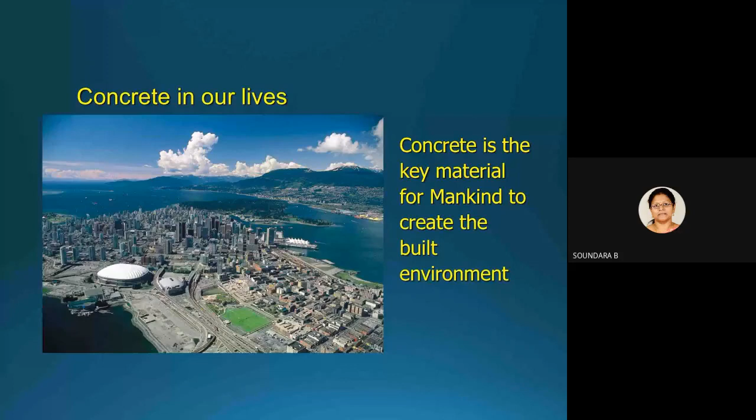First and foremost, the top consumption by human beings is water. Not only human beings, other living creatures also. Next to water is concrete. Wherever you have infrastructure or buildings, without concrete, nothing happens - whether it is bridges, roads, railway girders, or underpasses. As population growth increases, infrastructure will also increase, and naturally you'll be bound to build more structures, mostly with concrete. Still, there is no replacement material for concrete. Concrete is a mixture of two or more components like cement, aggregate, water, and admixture. These are all well-known definitions.

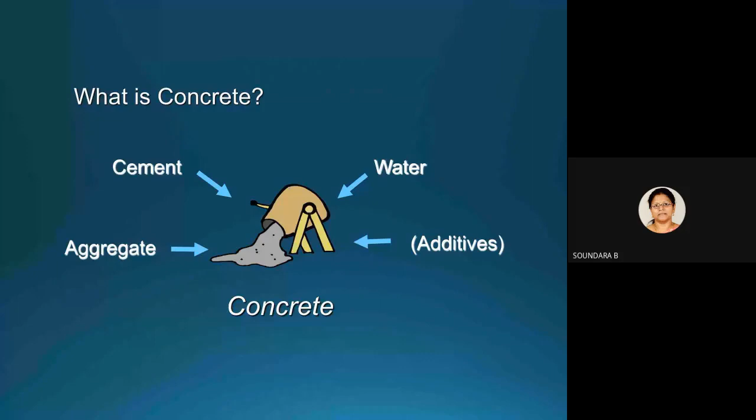Now my question is, how good is this really? Why do we have to make this forensic and failure investigation? What is the ultimate root cause? Some structures are very ancient, built in 3000 BCs or 6000 BCs.

This is a simple view of an Egyptian pyramid. It is long lasting, and it is made up of geopolymers. The concrete was not deteriorated. Of course, it is in the desert area, and we know the temperature in Egypt is too high. So even after 6,000 to 7,000 years, the structure seems to be long lasting.

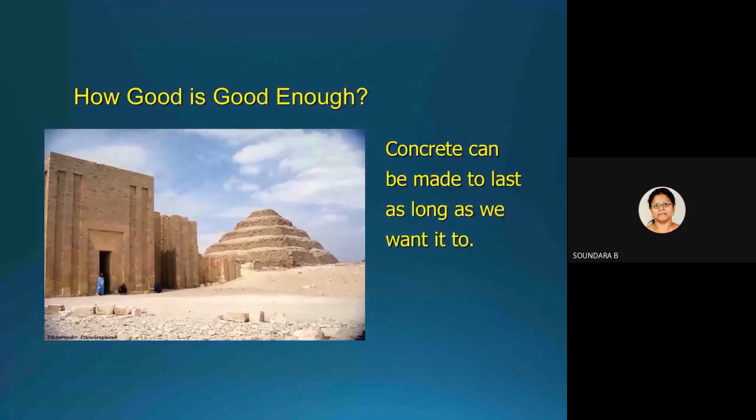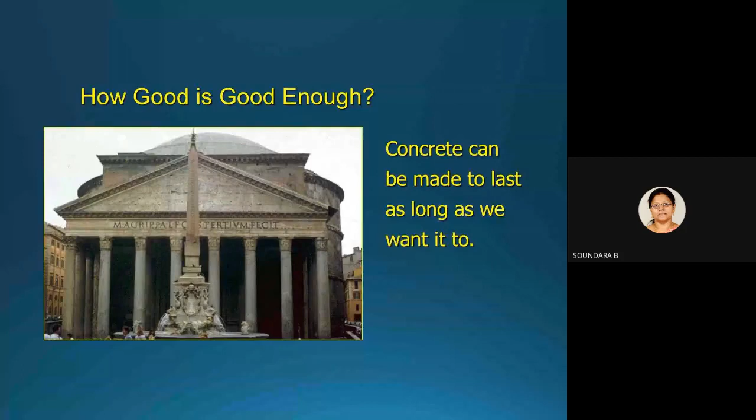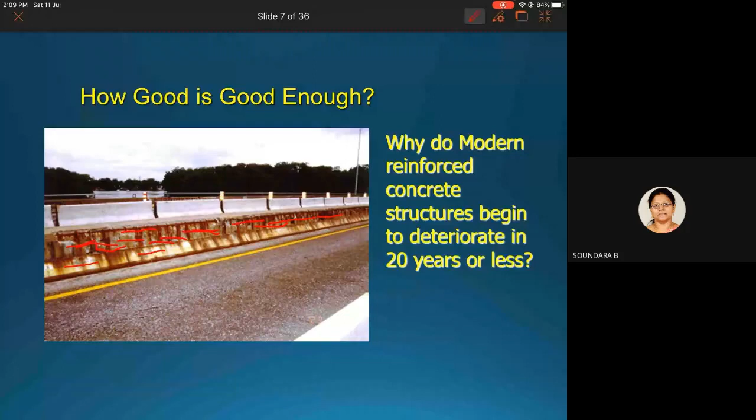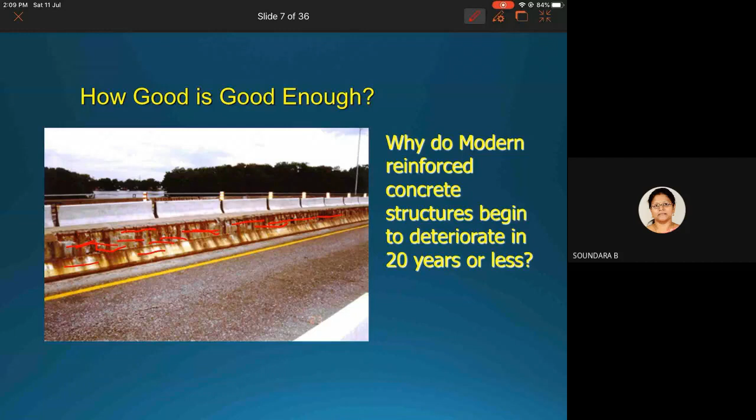Why? So this is the topic which we will be seeing - why has this happened? What is the root cause? Here there is no question of 'maybe it might be' - you cannot say like that. Maybe, might be, means you yourself are doubtful about the structure, not very confident enough. Why is that? First and foremost, we need to address the problem - what is the primary root cause for this?

The root cause possibilities are broadly classified into four types, which I have segregated into four classifications. We need to just diagnose the issue, whether it will be because of this.

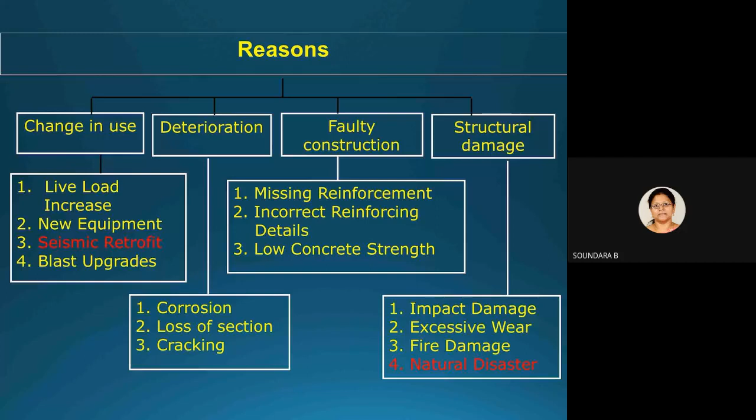Because lots and lots of - suppose when a problem comes and you are very severely sick, when you go to the doctor, he will not give you an injection or medicine immediately. He will ask you lots and lots of questions - what is the symptom, how did you face it, what was the problem encountered, how long have you been facing this issue. He will ask some symptoms, whatever comes, one by one, and based on that he will diagnose - okay, this guy had taken something like food poisoning, and he didn't take any other thing, and subsequently he got this problem, etc. He will do the thing.

So the same sort of exercise, you need to diagnose, you need to do some work. The first thing is, what are all the things? First, change in use, deterioration, faulty construction, structural damage. You need to dig out all these aspects and examine them.

Change in use means - what happens is, let us take an example. You have built a bridge, suppose in the 1940s. Later, in the 2010s or 2015, it got severely damaged.

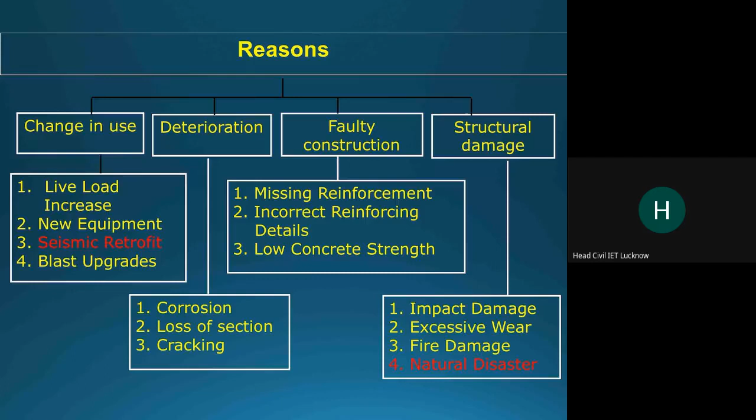So now, what is the weakness in reinforced concrete? These 4 points have to be kept in mind, whatever I have shown previously. Based on these 4 points, you have to start building. So I'm telling you now, what is the disadvantage of using RCC? I'm not saying don't use RCC, but you have to use it with proper precaution. If you fail to implement things lethargically, you will get serious disturbances like this.

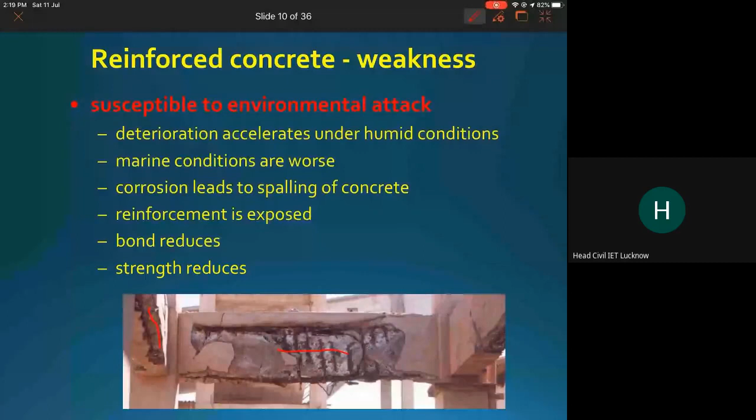You see how badly this beam is affected. You see this portion. This is purely based on the corrosion action. And you see the quality of the concrete, how poor it is. So that is the thing.

So what is the weakness behind this? It is more susceptible to environmental attack. That's why IS 456:2000 always specifies, from mild to extreme environmental condition, please use a maximum water cement ratio of this much, please use a minimum cement content of this much. In case you are using PCC, use this much; in case you are going for RCC construction, use this much. That is the reason why they have categorized 5 different environmental exposure conditions, and you got to use it very carefully.

Here I presume that this concrete is of poor quality, so it has given enough room to ingress all your moisture, that is O2 and other external agents. So the problem is with the concrete first, and then when the ingress of moisture occurs, the electrochemical reaction starts and it starts peeling off.

Whereas the reinforcement, whatever they have tied for this beam element and everything, is very obvious, very clear, very perfect also. But the thing is the deterioration, the deterioration is in the concrete. The problem is with the concrete quality.

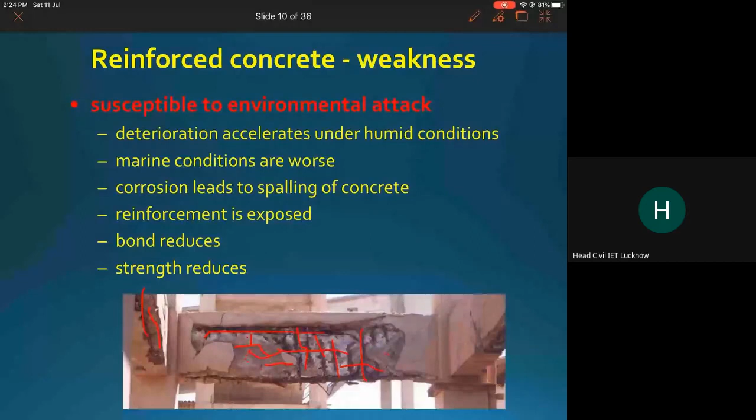So this is a practical case study from Nagapattinam, which I visited some 10 years ago. This is a police quarters building in Nagapattinam. What happened is it is a 25-year-old building, but for the past 5-6 years they weren't using this. So don't think these are just the termites. It is not the termites. It is the peeling of the rebars, and it has peeled and it is hanging here. So you see how bad the condition is and how poor the concrete is.

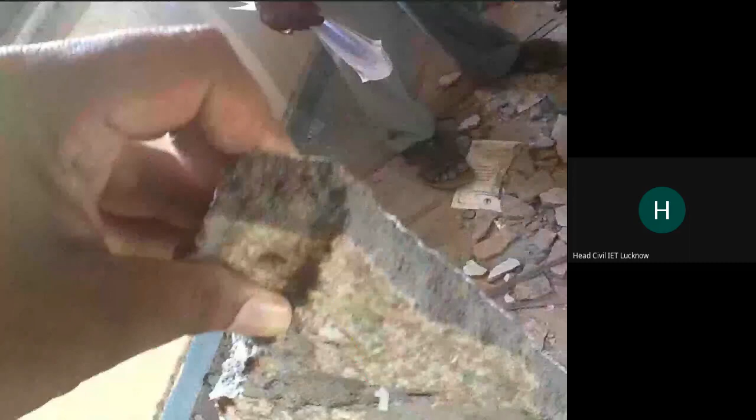So the PWD people came to me and they were asking what is the opinion? Can we retain this? Actually speaking, this is a five-story building. It is a police quarters building, and at one point of time when I was moving to the third level and fourth level of the building, the staircase was very bad. So when we climbed, the concrete started falling down. You see how risky it was.

So then the engineers over there were trying to pull me out. Sir, we will go immediately. Then I said, no, no, no. Let us go inside and we will see what is going to happen. No problem. If something happens, we will jump. No issues. What will happen? Only some leg or some bones will get fractured. No problem. I went because 10 years ago I was still young, right? So I was not scared to go. I was very keen to see, because the structure is of course in a very bad position, but why has that come?

So we went to the fourth floor level, and the seashore was very close. It was just 800 or 900 meters. This was built somewhere in the year 98 or 99. At that time, nobody used M20 concrete over there. They just simply went with 1:2:4. They used 1:3:6, or some 0.7 water-cement ratio. They were never bothered whether it is a seashore area or whatever. And the temperature in Nagapattinam, you will know very well, is very high. Plus, since it is very close to the seashore, these all will be in extreme condition.

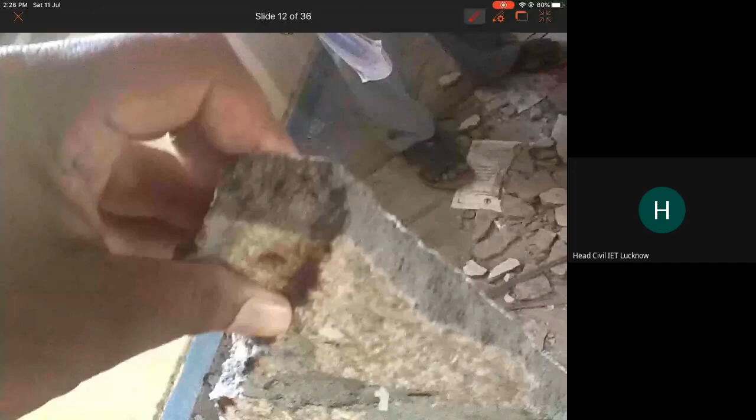So in this case, I started digging into the histories. I came to know that the concrete quality was poor, and they didn't follow the proper procedure. And more importantly, the cover block given to this roof slab was totally insufficient. And when the concrete quality is poor, the cover block and other things are secondary only. So you have to make a very highly impermeable concrete, then only you will not face problems to this extent.

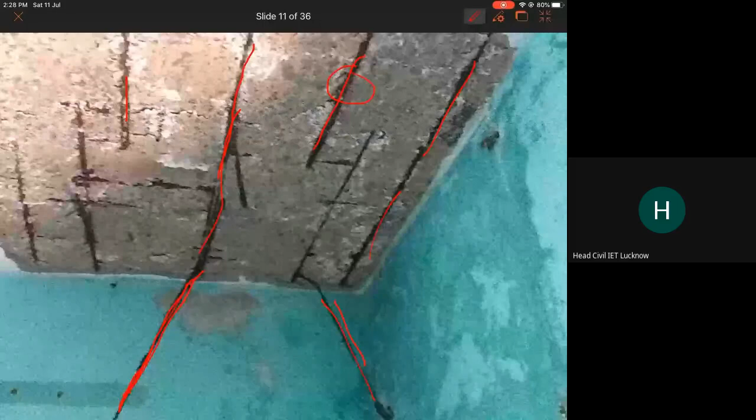If they would have attended to this problem some 5 years ago, we could have safeguarded to some extent the maintenance, the abrupt dampness in the walls and everything. The condition has become worse and worse. So then finally I said, if you want to go for repair work, you just calculate: the present cost was 3 times the estimated cost for the repair work.

So we were seeing the foundation and everything. The foundation was strong enough, it was good, but the superstructure was very bad. So then we told them to demolish the superstructure, the five levels completely, and we told them to rebuild, reconstruct. So this was the procedure.

So these are some of the worst. Still many things were there, many other places I have been. So this is a small part of the case study which I want to show you. Lots of things were worse than this also. So that is the thing. So in this circumstance, we have to diagnose.

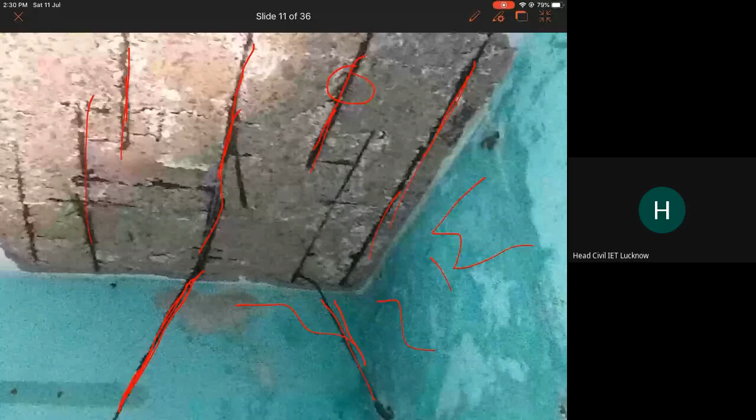So a very good valid proof in my hand is this. I can say how bad the concrete is, and moreover, they have left it unoccupied for 5 years. They didn't attend to anything. After 5 years, after further undergoing more and more deterioration, if they want the repair work, how to do it? We can do it, but the cost is going up. So for that purpose only, we have to collect some evidence. That is the reason why we call this forensic engineering.

Just imagine some murder has occurred. When the police officials come to investigate how this murder has occurred, what was the root cause, they will not allow the public to come and touch. They will be calling the forensic people to take the fingerprints if any. With those fingerprints, they will have the criminal list, so they will be scanning and they can identify the person. So this is called forensic investigation, the intelligence. They are collecting some proof.

Like if the police have caught the accused, naturally the opposition lawyer will defend. He will say that my client is innocent, he has not done it. So what is the proof? The judge will ask, what is the proof that he has murdered? So you have to collect some evidence. So that evidence is called forensic engineering.

In the same manner, for a structure also, you should know what is the reason for this failure, because many legal aspects will come. Whenever some sort of sudden failure comes, it will go into the legal aspect. So the person who is nominated as a third party or a visitor should be capable of explaining things. So he has to collect the evidence.

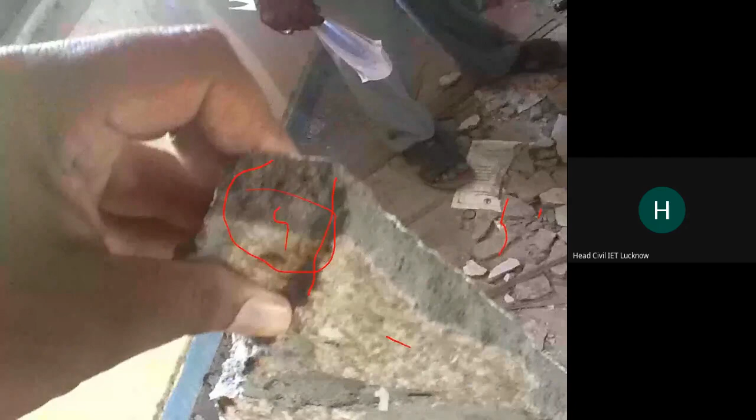I have calculated. I was asking how many buckets of water you have used for this. So the person who constructed, an old person, was there. So he told the specification. From that we worked it out. So when you do the forensic investigation, being a higher official, you should not feel reluctant to talk with the lower people. You will get some clues.

Normally, when I go for the investigation, I don't bother about the chief engineer or assistant executive engineer talks. Their input is also very important, but I am in touch with them forever, so no problem. But people like the masons who were involved, I will be going down to them and asking. So we will get some valid information from them. So these are some clues to collect things.

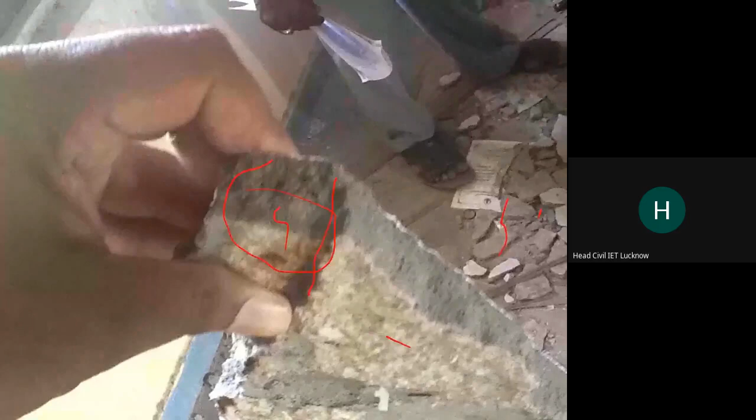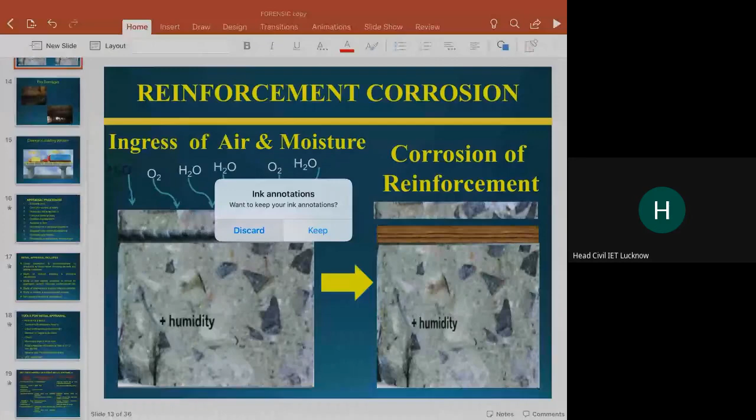So this is what you have learned in your concrete technology, how corrosion propagates. Ingress of air and moisture leads to further damage, due to the sudden ingress of air and moisture. So this is the output. So you can see here, this leads to corrosion. The more permeable your concrete, the more the electrochemical reaction happens. Your steel bars will get stressed and form rust.

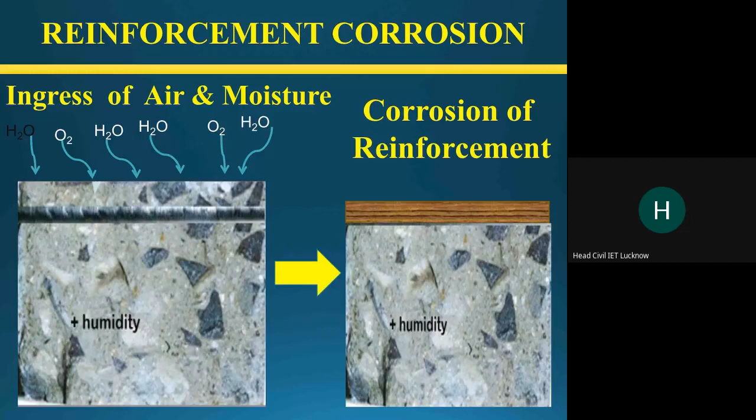Fe2O3 forms. So this is another photograph of a building which was subjected to fire. You have to be very careful because we don't know how that concrete will behave. You should know the intensity of the fire. Though the external temperature was like 150 or something, the internal heat will be like 80 or 90 degrees. So only because of that, your concrete was safeguarded to this extent.

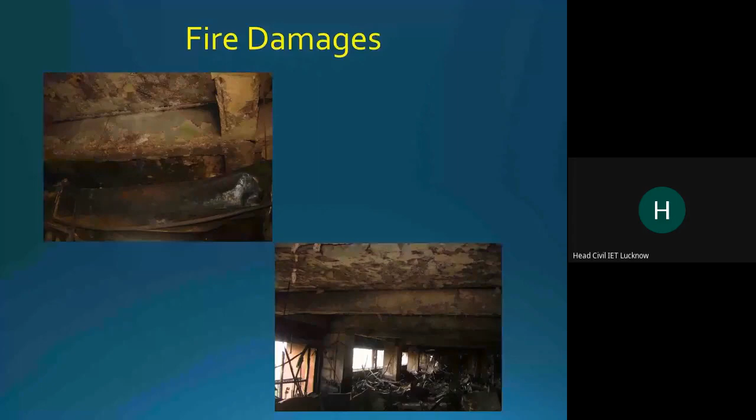Otherwise, it would be gone. You cannot see anything. You see here, these are the less impacted ones. If the fire intensity was too high, you see how the AC duct was melted. This is a commercial building, and suddenly it caught fire. So how to do it? We should be in a position to do the repair work.

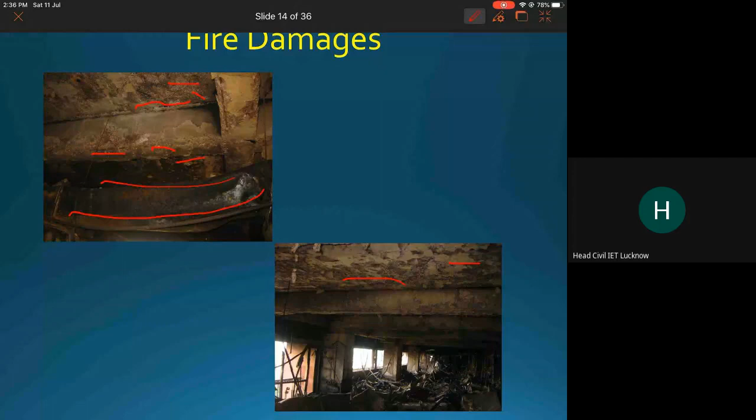See, such commercial buildings would have been insured. So the insurance people will come and inspect, and they will rely more on the report of the third party agent. With a government organization, the expert has to certify that this has happened and this was the root cause. Without this proof, the insurance amount cannot be claimed. So these things become very, very important.

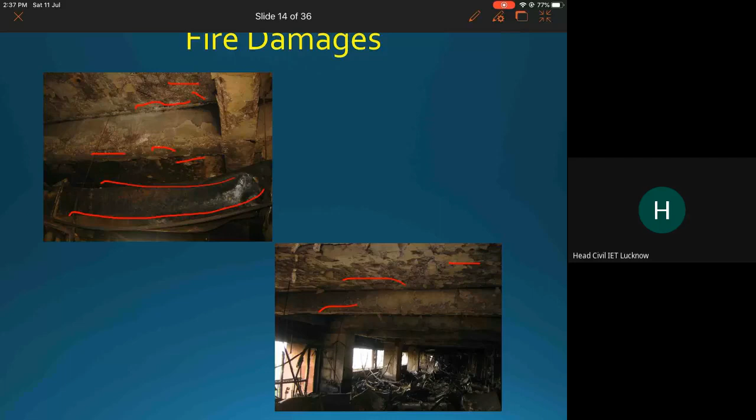So you should be in a position to know what is happening and why this has occurred. Of course the intensity of this fire was very minimal, so we safeguarded this. The photographs of that will be coming further. In those four subdivisions, I have given you fire damage. To show that, I have just shown two photographs, but we will see it in the later part.

See, this is the change in loading pattern, which we saw in that flow chart. Imagine in 1950 the truck size was only this much, so the axle load was very less, and the bridge was there. Whenever you go by a weighbridge, they will tell you the bridge's allowable axle load is only this much. They should have the weighbridge record, and only then will the police allow that truck to pass over that bridge. Otherwise the bridge will fail.

If not, he has to go around. Going from one place to the other will be just 10 kilometers if he crosses this bridge. If the load does not meet the requirement, he has to go 50 kilometers around to reach the destination. So that is the difference.

So that is the reason why between the 1950s and 2000 the variation is more, because of the population demand. The population in 1950 was very less compared to 2000, but in 2000 it is very abrupt. So these are all the factors you have to keep in your mind, right?

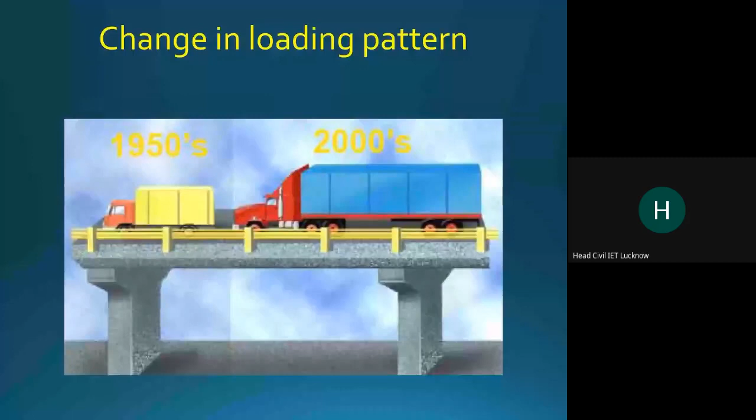Like, you should not just go, like I have been to Nagapattinam, that building. No, same way you should see the safety also, because our safety is also very important. So now if you tell me to go over there, I will think twice. I will not immediately go. I will ask them to put some other means to come to that place to investigate.

But I will not directly climb, because now I'm not like how I was 10 years ago. So those things are there. So it is like that.

So these things you have to carry out. You have to get the data. That is our duty. Only after that can you give the final report. So for all those things, you should take the evidence. If any testing is required, you have to do it.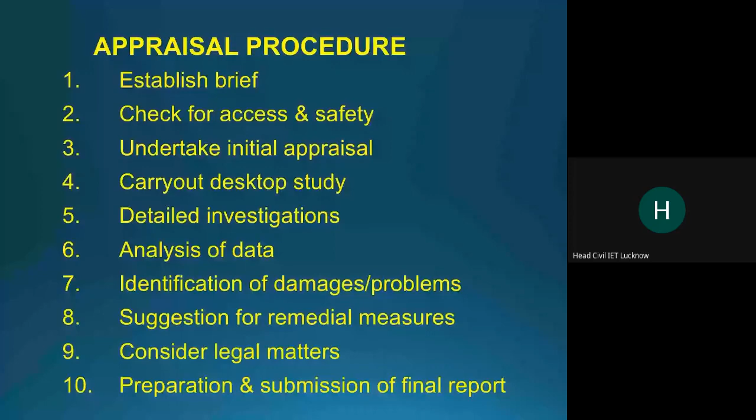See, what is this initial appraisal? First and foremost, visual inspection. Don't sit here and ask the client to send the photograph. That is a wrong concept. You have to go to that structure and visually inspect. If there is no provision, they have to make some alternate for you, like using a ladder or something. You should physically inspect.

When you go there, you will get some evidence. Otherwise, you just sit in the four walls and ask for photographs, which will never come, because site inspection, visual inspection is very very important. Say I have a structure that is deteriorated somewhere in Mudumalai and the PWD people are calling me, I cannot go to Mudumalai quite often. So once I go, I have to utilize it completely. I have to take as much evidence as possible. I should study the structure completely.

Then study the as-built drawings and structural calculations. You have to see whether it has undergone any structural failure, any under-designing, if anything has happened. So all those diagnoses you have to do. Then if they have previous material test reports from the time of construction, or some third party inspection reports, you have to take all those things. You have to see the historic records. Don't miss any record. That is very very important.

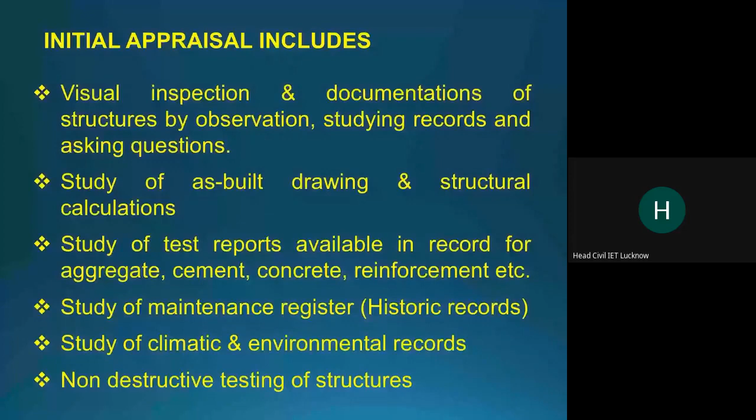Finally, you should do non-destructive testing. Non-destructive testing is very very important. So a forensic investigator who goes should make sure that these tools, if not full, at least some partial amount, say 50% or 60% of these tools, should be ready.

You should tell at least the engineer side who is calling, the PWD people or whoever is taking you, okay, please ensure that. Or if you have your own kit, you can take the kit over there and test. Better to have your own kit rather than telling them, because you are investigating, you are giving the report. So don't rely on any third persons.

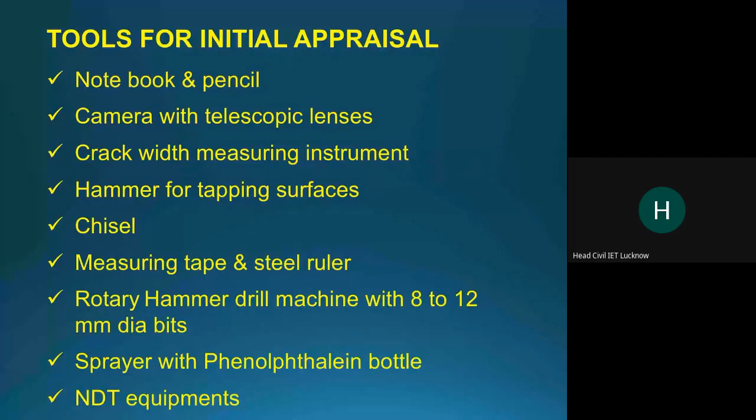So these are some simple NDT tests. Your rebound hammer, ultrasonic pulse velocity, whatever is required as per the site condition, you have to take, and you have to work. Then from that, what is the outcome based on your initial appraisal? What are all you are going to recommend immediately?

See, suppose if I was suggesting some repair and rehabilitation method in that police quarters building, I must tell them the person who works there should be freed from the dangerous things. So proper propping or any other things, the temporary supports and everything should be made rigid in such a way that the person who works over there should not get any risk. So those recommendations and everything you have to give.

Then you should say some appropriate technique. There are numerous techniques. So what are all the best techniques that can be implemented? Repair and rehabilitation technique, you can say. Then identify the probable cause of damage until the detailed investigation. It is your duty, you should analyze this failure. So is this a corrosion crack, or is this an alkali aggregate crack? Or else is this carbonation? Whether this concrete was carbonated and other things have come into the picture. All those things you have to find.

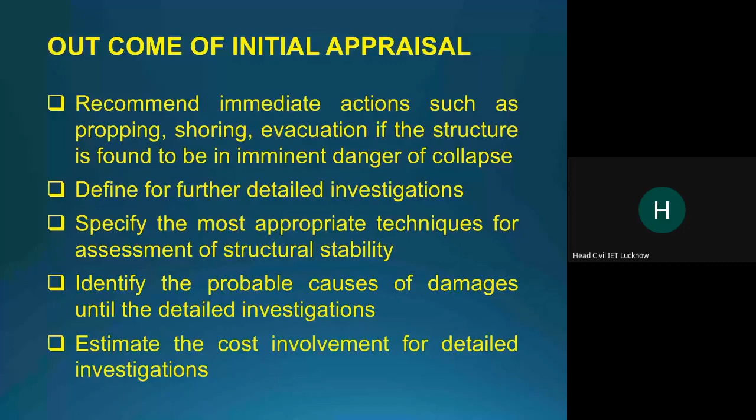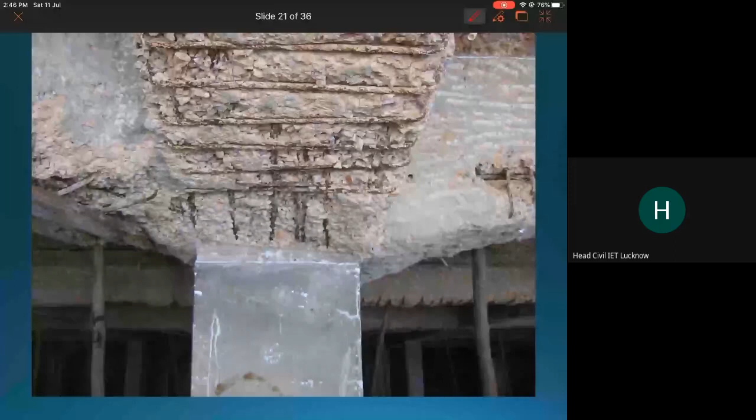You see another example. Why I am putting this photograph is, this is another basement framed structure building in the sub-basement. You see the quality of the concrete. It is very poor here. Though the steel reinforcement and the stirrups were done okay, still you see the quality of the concrete, there is no proper packing. So thereby it got severely corroded, but still the bars are not massively corroded. It has some life, we can still strengthen. But the process is quite tedious.

So if you just pack it with some mortars or anything, again after 5 years that mortar portion alone will fall down. So that is not the correct practice of repairing. You can think that it is just very cheap in cost. It is not that much, but until you strengthen this concrete and make it highly impermeable, these things will propagate as the time progresses. So this is very important.

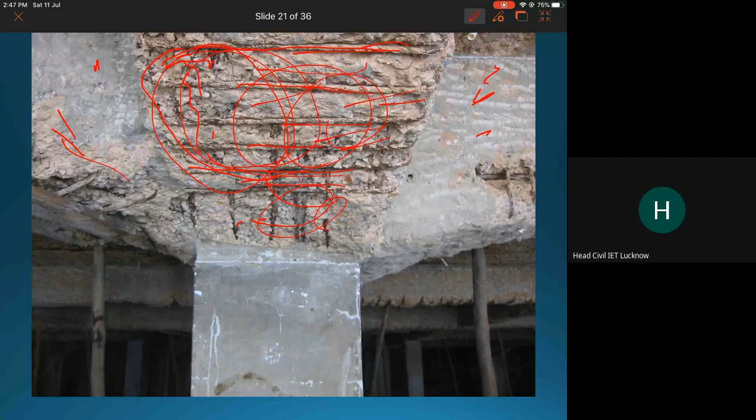So you see this, you can see the concrete. Exteriorly they have just plastered the surface. That was looking good, but after chipping off, you see there is no cement at all. Most of the particles, you can see the sand particles more than cement. So that means they haven't followed the required cement content. You see here, the sand content is more. There is no paste content at all. Then how will you get the bonding when you haven't added the cement content adequately? So these are all the poor things which you have to take seriously, which we cannot compromise.

So this is the sub-basement area. Can you collapse the entire structure? Can you demolish? No. We have to repair and rehabilitate. No other go. The cost will go 3 times if he demolishes that. Only this portion was damaged, only these adjacent portions like this. Whereas the superstructure and other places were okay. But if the entire thing was like this, then it is a bad sign. How much loss? Imagine this has occurred 5 years ago or 10 years ago. Just imagine the initial investment made by that client. All his money went in vain. So these are the things.

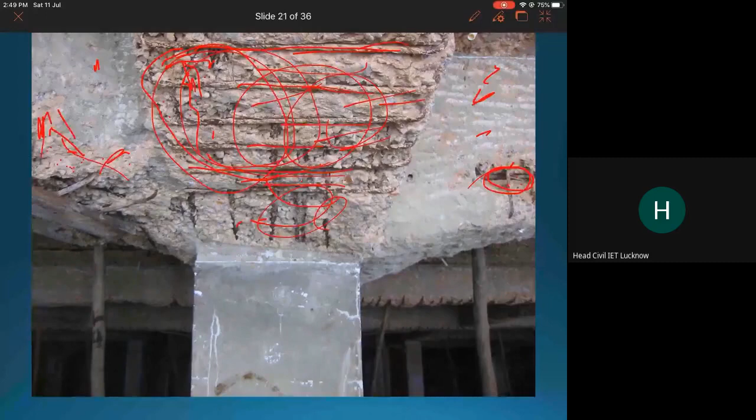And this is another case study, the foot over bridge.

For the safety purpose, barriers were built in such a way that the pedestrian should not come over here, and it is our duty to put some cautionary signboards also, fixed with reflectors. Especially this should be readable at night times, so the reflector boards should be fixed properly. So that is one thing.

This can be repaired. You can see the adjacent portion of this bridge, the expansion joint portion. The expansion joint is collapsed. You see here, this is the steel element which is linked from one joint to the other joint. This is the hollow, 20 millimeters or 25 millimeter spacing, whatever we have given here. So that joint is distorted, and you see here the lap has got cut.

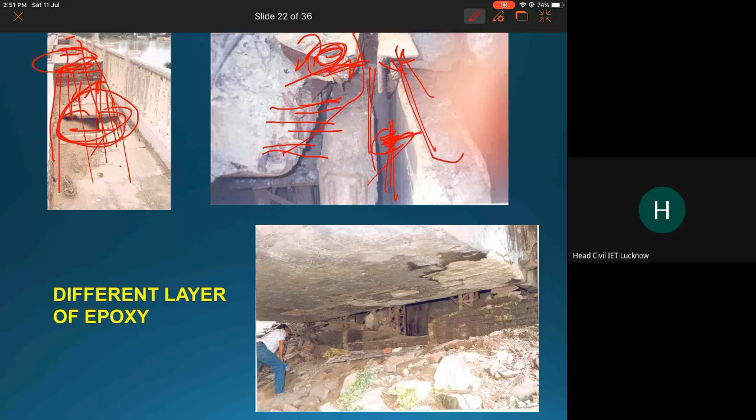So we need to rehabilitate this. Why has this happened? Because of the periodic movement of vehicles and other things, and the poor maintenance of the structure. Externally, it has caused lots of wear and tear, and because of that, this joint got collapsed. Every time the expansion joint should be sealed, and for frequent downpours, when the rain was coming, they didn't seal the joint properly.

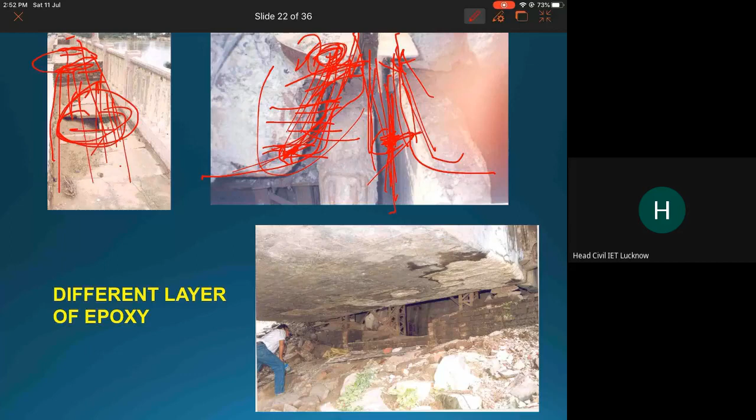The girder means, I mean to say, the slab, deck slab. The deck slab should not go to any failure. So this is distorted now, so you have to bring it back into position. You have to chip off the deteriorated thing and go ahead. For all these things, you should have proof of why this has been distorted. They will ask what is the root cause, why it has happened, and several other questions. So you should be in a position to face their questions, and reply them also in a very convincing manner.

So this is the other view of the bridge, showing how after doing the repair works, the joints and other things are tied in the lower bottom portion. And this is another thing, a silo, a cement storage silo, RCC silo.

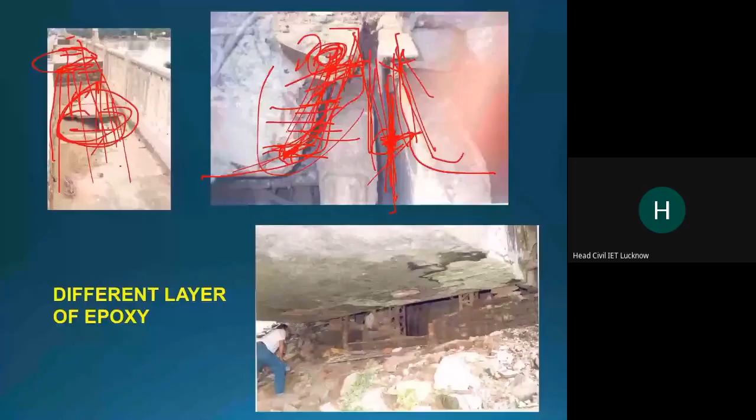The silo is severely corroded, and we worked on this. We chipped all these things, and we were measuring how much was the intensity of this corrosion, and thereby, in the later part, how this was brought to the original position. We have rehabilitated it in a proper way. We gave some protective coat and other things, and we made the concrete more denser. So this is the thing.

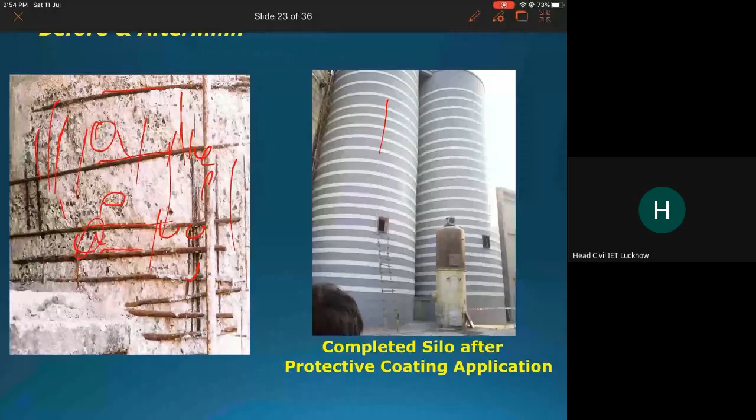For all these things, you should first do the diagnosis. What is the main cause? What is the primary cause? And then you have to suggest the apt repair methods.

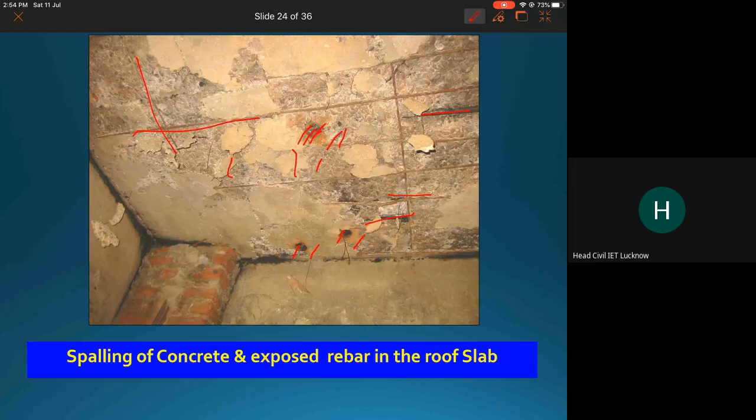Again, the building that caused fire, whatever I have shown in the initial photographs, coming to this, you see here, luckily the reinforcement, only the cover block was spalled, and the hooks, the fan and other things, the ducts didn't fail. Electrical conduits, whatever was passing, didn't fail that much. It was encased, it was properly done. So the concrete quality was also good, so luckily this got escaped. The only thing is, because of the huge intensity of the fire, these zones should be strengthened properly.

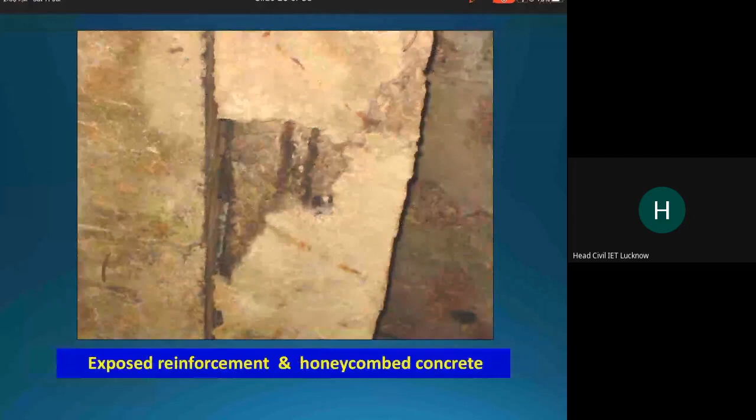So that is the thing. The rebars were exposed, and we were testing the corrosion depth and other things. So we protected the rebars. There are further other things to consider.

Luckily there was not much severe corrosion, but because of the heat of the fire, the concrete got spoiled. So the only thing needed was to strengthen this concrete. You have to strengthen this surface. The concrete should be completely strengthened, and then it can be done.

Luckily the building was not hit with excessive fire, though the intensity was 80 or 90 degrees. It was okay, halfway through, otherwise the electrical PVC conduits and everything would have been burnt.

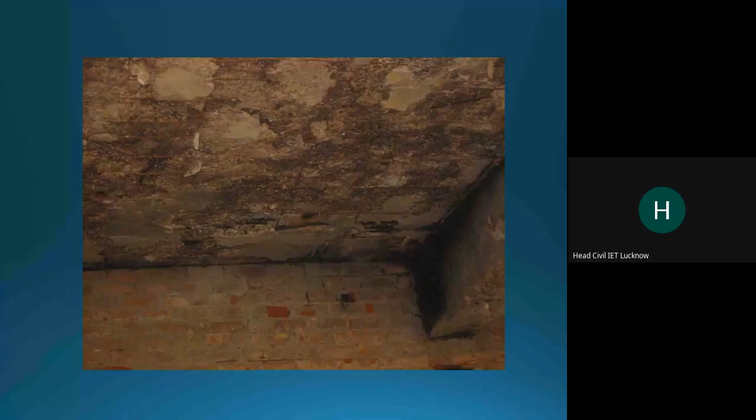Okay, so these are some snapshots. You see how black it is. So you need some preliminary treatment to undergo these things.

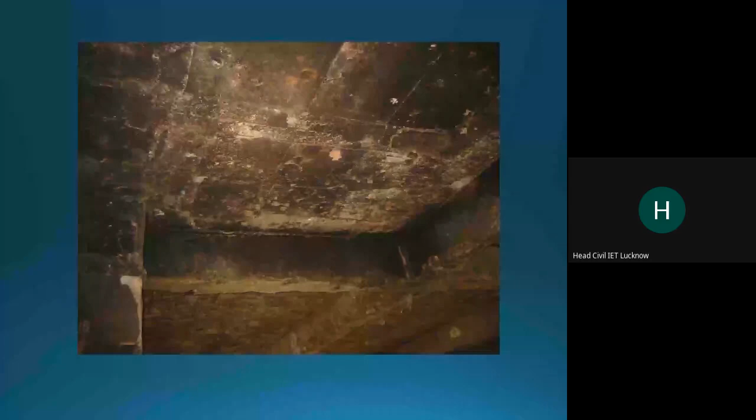So these are the things. See how the intensity of the fire hit, and all these things. So these are some strengthening techniques which were used.

So what happened in that black portion you saw previously? We were chipping off all the damaged material, keeping the rebars intact wherever they had come, by providing proper props. See here, I have given adequate props. Otherwise, if I just left it, though it was surface level, the cover is completely exposed here.

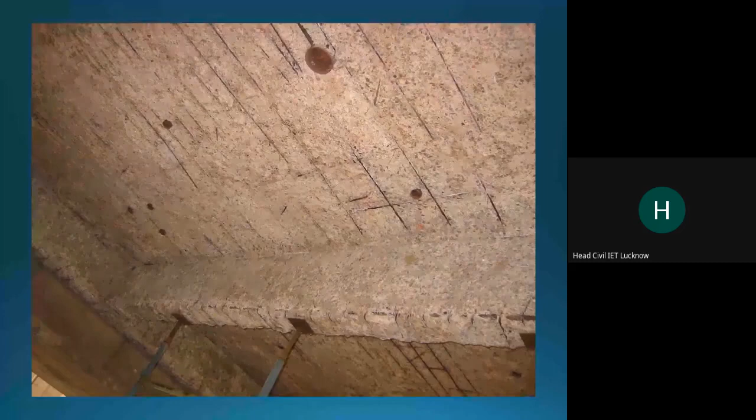Luckily the rebar was not badly corroded, and nothing else happened, because the intensity of the fire heat was very low. Imagine if it was 500 or 600 degrees, the concrete would have been gone, and you cannot do anything for that. That is why in fire aspects, you have to be very careful.

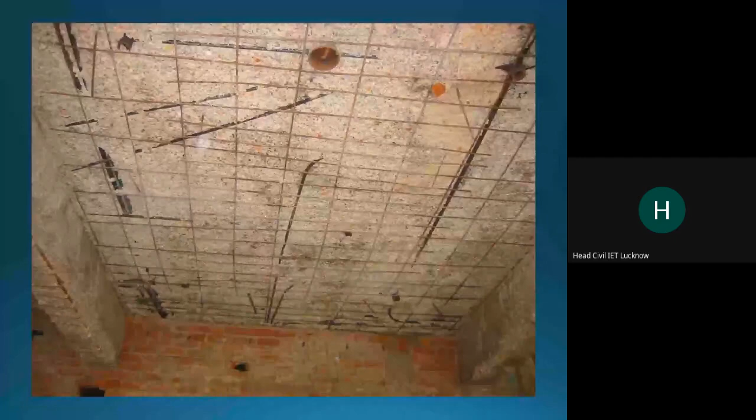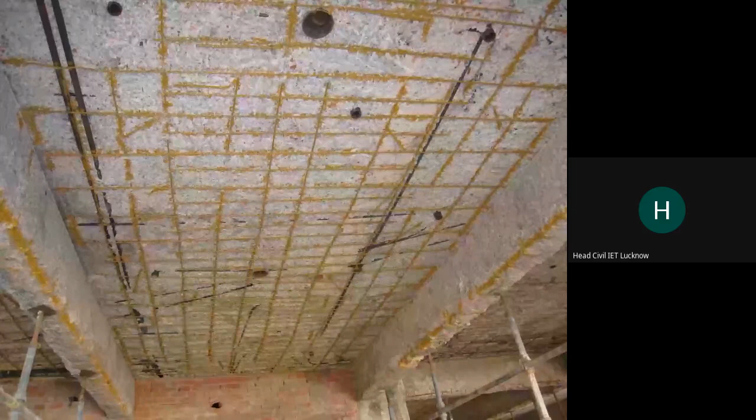So these works were redone. Still the bars were made visible, and they were coated with epoxy paints or zinc chromate paint, and then made intact. The conduits and everything were rechecked properly, and the ducts and everything, the proper provisions, how it was. And this is the final finish.

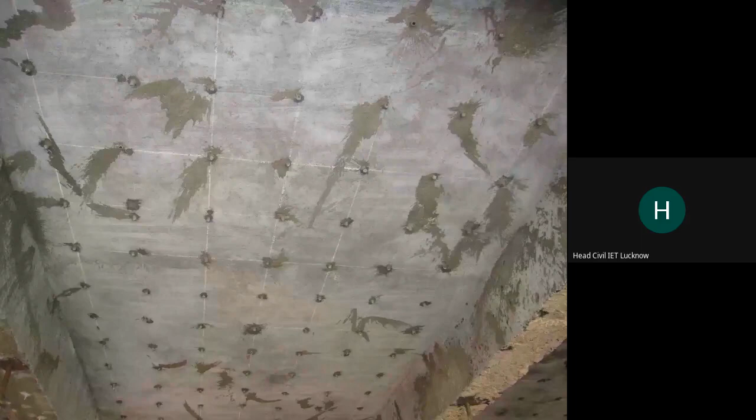The concrete surface, the slab surface, the base slab - that surface needed to be strengthened. The concrete has to be strengthened, then it will be okay, because luckily the rebar did not get severe vulnerability. It was not melted or anything, because the intensity of the heat was very low, it escaped.

It was a narrow escape. Otherwise, if it had been left for a few more hours, say 3 or 4 hours, the scenario would have been completely different. So this was stopped - the loss was stopped at a quite early stage. That is the reason why it is.

So this is another thing. With this short presentation, I will close today's presentation. Now I will open the session for discussion if you have anything.

Sir, this is Srinivas Prabhu. Okay, Srinivas Prabhu from? Sir, from Sri Ishwar College of Engineering, Coimbatore.

Okay sir, my question is, what is the reason for peeling of paints in walls, sir?

Peeling of paints in walls has various reasons. Maybe some fungal attacks will be there. And if you have not maintained it frequently, those things will happen. Mainly because of the fungal attack.

If there is some dampness - when you go for any masonry wall construction you can see lots and lots of dampness in the wall. Because of the dampness, what will happen is the plaster coat, whatever you would have given.

At maximum you will be going for 12mm or 8mm or 6mm or 10mm based on your requirement. So what happens is that plaster will get stressed. Because of that stress, the plaster strength will be very less only. So what happens is it will peel and stop at a point.